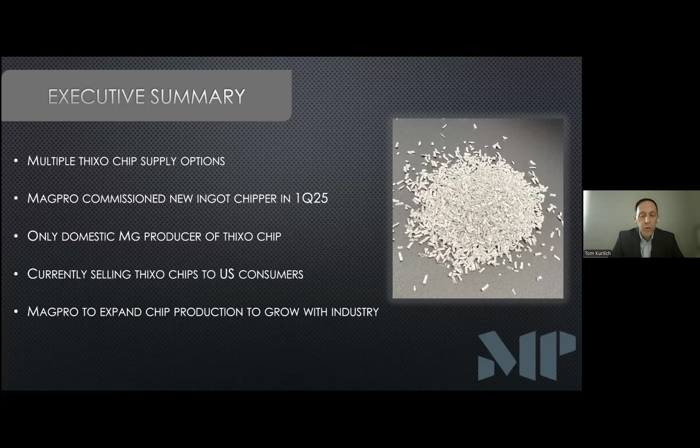In terms of an executive summary, consumers in the United States now have multiple Thixo chip supply options. Magpro commissioned a new ingot chipper in the first quarter of 2025. This decision was made to start producing chips based off of feedback from consumers and their request to purchase chips directly from a magnesium ingot producer. Today, Magpro is the only domestic magnesium producer of Thixo chips in the United States. We've been selling Thixomolding chips to our consumers in the US for the past 6 months, and based on the positive feedback from those customers, Magpro will be expanding our Thixomolding chip production in order to grow with the industry and ensure no risk of raw material supply interruptions.

A quick overview on Magpro. We were established in 2003 and have over 20 years of continual ingot production. Our facility is based in Camden, Tennessee. We are a full-service magnesium recycler specializing in type 1 and non-type 1 magnesium scrap. We are a producer of secondary magnesium alloys for a variety of industries, and we're the only pure magnesium producer in North America.

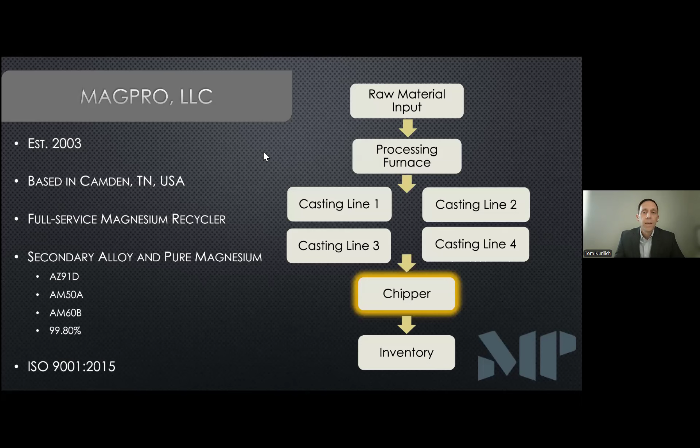Our production facility is ISO 9001-2015 certified. From a process flow, Magpro begins with the raw material input of type 1 and non-type 1 scrap. It's brought to our processing furnace and then taken to one of 4 casting lines that can produce a variety of ingots in different shapes and sizes. Those magnesium ingots can be directly sent to our inventory or to our new chipper to produce Thixomolding chips.

Looking at Thixo chip options, Thixomolders in the United States have the following 3 options when it comes to purchasing magnesium Thixomolding chips. The first option is to utilize a third-party chipper that's located in the United States. In this scenario, the consumer first purchases the magnesium ingot from a domestic or offshore producer. The magnesium ingot is transported to the third-party chipper. The ingot is then converted to a Thixomolding chip based on the availability of that third-party chipper.

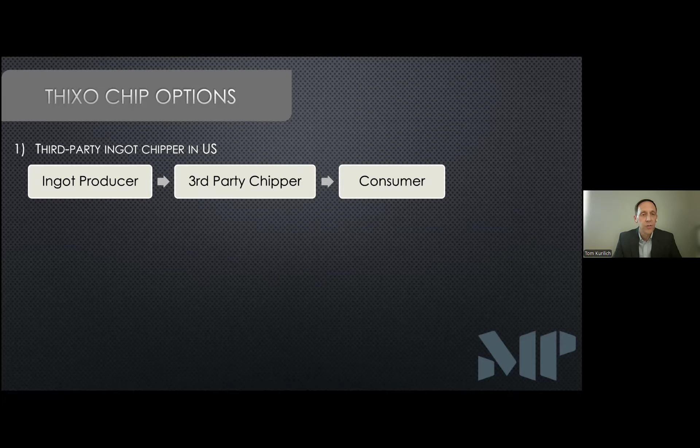Finally, the Thixomolding chip is then transported to the consumer. Under this scenario, the consumer must account for additional freight costs, lead time for delivery, the handling of any off-spec chips or ingot butt ends generated by the third party, and finally, the potential to carry additional on-site chip inventory to address any delays during production and transportation.

The second option is to purchase chips from an offshore magnesium producer. In this scenario, the magnesium ingot is produced and transported to a third-party chipper. The ingot is converted to a Thixomolding chip and then transported overseas to the consumer in the United States. Under this scenario, the consumer also has to account for additional freight costs, lead time for delivery, and the potential to carry additional on-site chip inventory to address any delays during production. Due to the excess time in transit, there is a risk of the Thixomolding chip being exposed to moisture, resulting in caking and oxidation within the packaging.

The third option is where Magpro comes in. This scenario allows for the consumer to purchase the chip directly from the magnesium ingot producer in the United States. This results in reduced lead time for delivery, reduced freight costs, reduced risk of moisture contamination and oxidation, and no off-spec or ingot butt ends for the consumer to deal with.

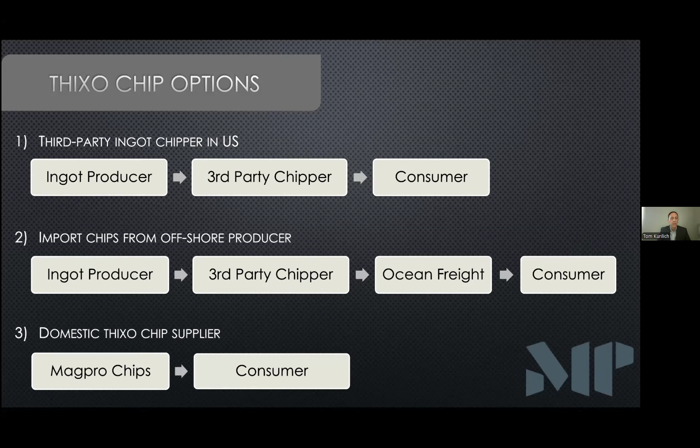Another advantage of this scenario allows for the consumer to form a closed-loop recycling agreement with Magpro, whereas 100% of the magnesium alloy scrap generated during the Thixomolding process can be recycled back to Magpro where we convert that back to Thixomolding chips. This results in cost savings for the consumer and them no longer having to deal with magnesium in ingot form.

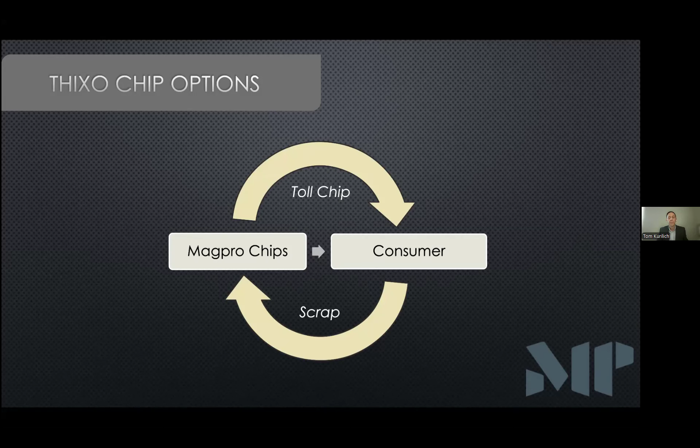Moving on to the commissioning of Magpro's chipper. The commissioning of our ingot chipper began back in the fourth quarter of 2024 with the construction of a new 3,000 square foot building located at our production facility in Tennessee.

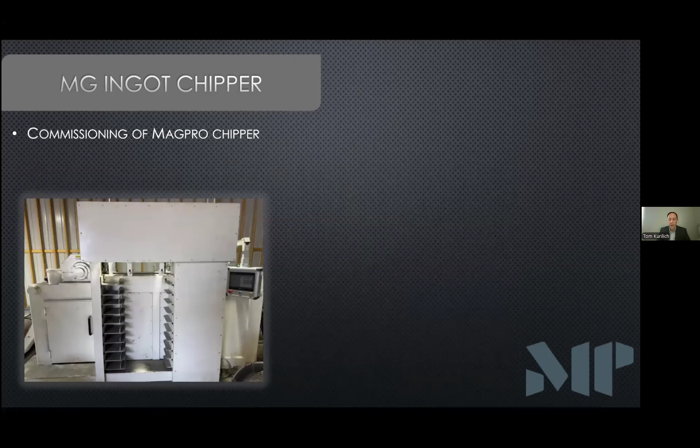Following the construction of the building, the ingot chipper was delivered and assembly began. Our chipper is equipped with an automated ingot feeder, as well as a high-powered magnet to capture any ferrous material, and any off-spec chip sizes or ingot butt ends that are generated during this process are simply recycled in-house by Magpro.

Here you can see the final product in chip form. These chips are consistent in size and shape, and they meet the requirements of the Thixomolding industry.

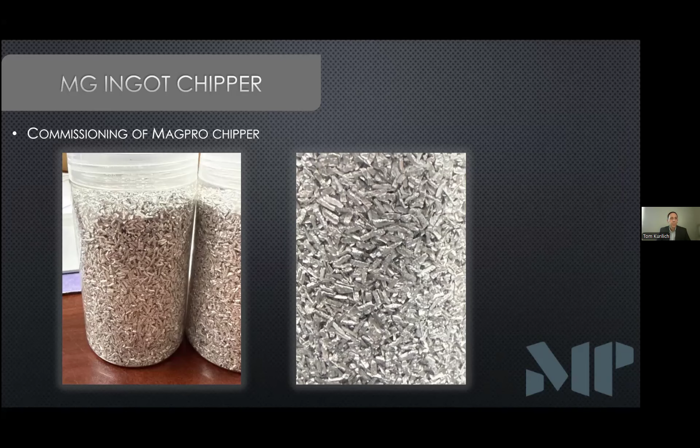Our Thixo chips are then loaded into super sacks, where we offer them in a variety of weights, up to 1,500 pounds, 2,000 pounds, and custom bag weights are available depending on the consumer's needs. These super sacks are placed on wooden pallets for easy transport to the end user.

In summary, Thixo chips are now available by a US magnesium producer, resulting in no off-spec or ingot butt end waste for the consumer. All scrap types can be tolled back into Thixomolding chips.

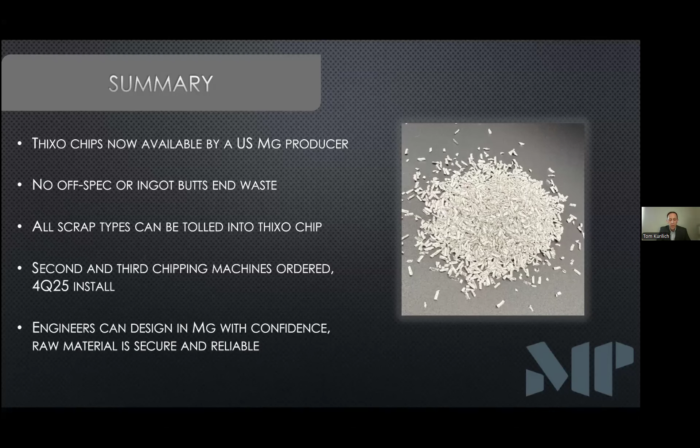In order to grow with the industry, Magpro has purchased a second and third chipping machine. Magpro will construct a new 7,500 square foot steel building to hold all three of these ingot chippers. The additional chippers will be installed during the fourth quarter of 2025, and production will be brought online as demand increases. Finally, engineers can now design in magnesium with confidence, knowing that magnesium chip raw material is available from a secure and reliable domestic producer.

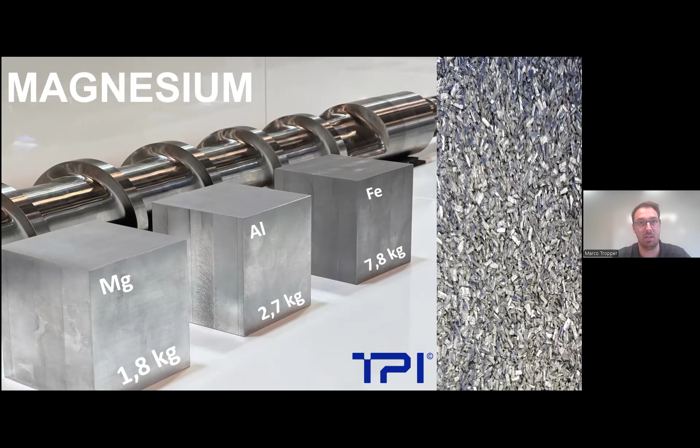As you know, magnesium is one of the lightest materials on Earth in the metal area. And we believe that in the future, magnesium has a very bright future, also regarding the fact that the EV and aviation businesses and so on are pushing more and more into lightweighting.

There were always questions why magnesium would never be a relevant material: magnesium is too expensive, too dangerous in production, and has too big a CO2 footprint. First of all, magnesium is already now in China lower in cost than aluminum per kilogram.

Second point, it's too dangerous in production. We solved this with our TPI technology, due to the fact that conventional Thixomolding is also a closed process with just-in-time melt preparation, and flame-retardant alloys are available. Last but not least, the CO2 footprint of magnesium can be lowered due to the fact that TPI only needs electricity to run, so it can be run CO2 neutral.

Magnesium can also be extracted from seawater, and with modern processes the CO2 emissions can be lowered even further compared to what was possible in the past.

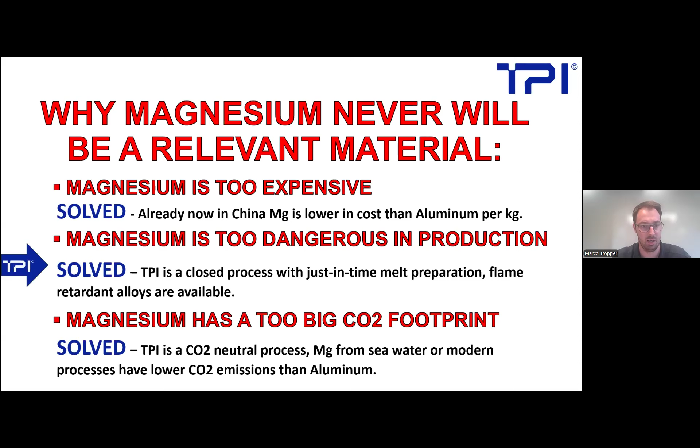So back a little bit to the history of Thixomolding. It was invented at the MIT Institute around the 1990s. They saw that when turning a ventilator inside a magnesium slurry, the viscosity was expected to stay the same. But due to the fact that the particles became globulitic, the viscosity went down, and from that the concept of Thixomolding was invented.

First of all, it was IP licensed by Thixomat. Out of the MIT Institute, Thixomat was founded and they held the patent on it, due to the fact that they observed the dendritic shape of the structure changing to rosettes, to mature rosettes, and then to the globulitic state where Thixomolding is used.

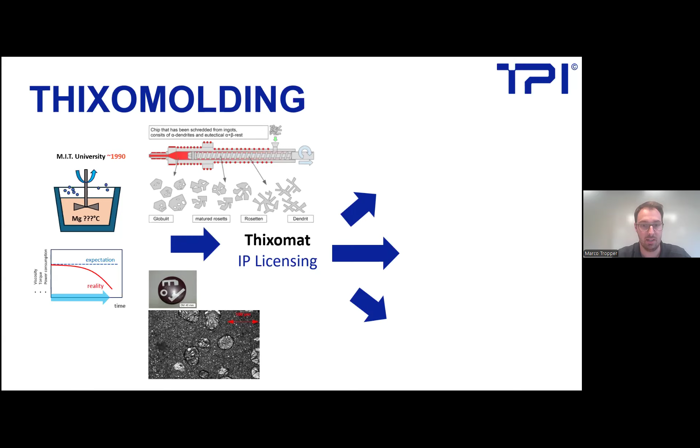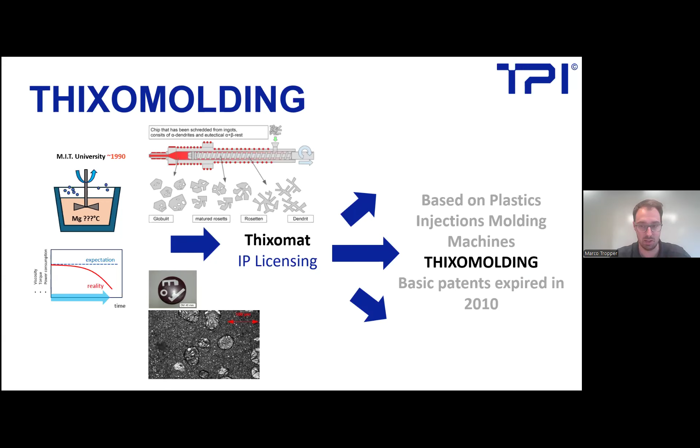After the licensing or patent expired, a lot of different suppliers entered this market and produced Thixomolding modules, or Thixomolding machines, which we call Thixomolding 1.0.

And why is still, let's say, nobody using it? This is because the technology is so new. And due to this fact, we have this webinar today, which is great to show what Thixomolding can do for you.

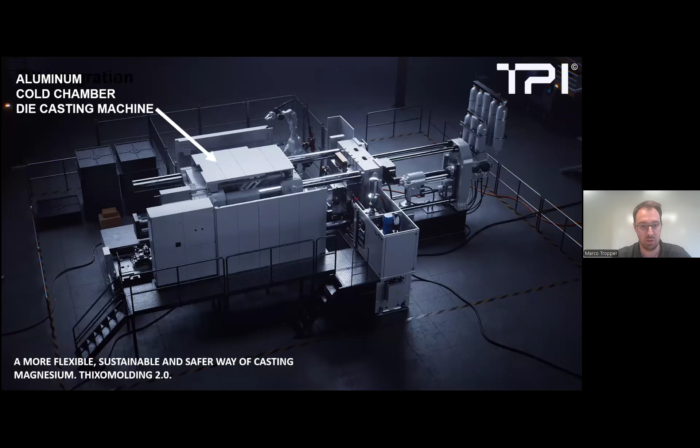So our module, which we call Thixomolding 2.0, as you can see on screen, puts a module that has a screw inside, bringing the material into the thixotropic state, onto an existing cold chamber die casting machine.

So we have a dosing unit, this is the TPI module. Additionally, the cold chamber die casting machine has the clamping unit and the shot unit. So you can do both processes with one machine, which can lower your capex.

Around 16,000 machines are operating in cold chamber die casting. We believe that with our technology and our module, we can bring a lot of these machines to Thixomolding, due to the fact that it's much easier, more sustainable, and more flexible for customers.

What we are combining is the plunger system of die casting with the screw system of Thixomolding, as you can see, along with the nozzle system with the plug. On the right side you can see the systems move together.

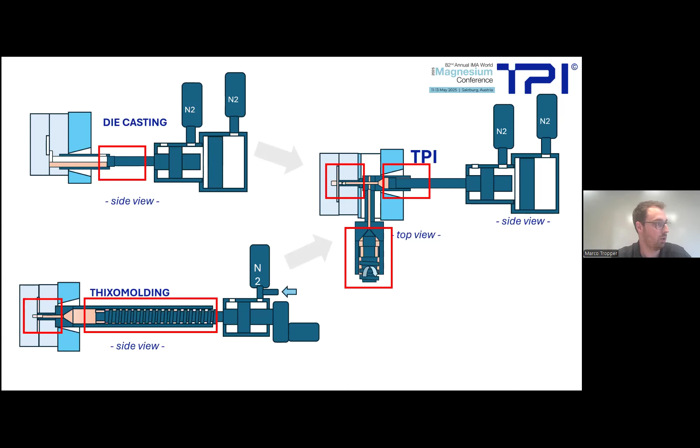We can shoot with the very strong injection unit of a cold chamber die casting machine up to 10 meters per second, while still using a screw on the side to dose the material and bring it into the thixotropic state inside the machine. The nozzle system also allows for a small gating system, and direct in-gating on the part is possible with our module.

Coming back to our name, it's Thixotropic Piston Injection. The T stands for the thixotropic state of the material, with low porosity, tight tolerances, and low energy consumption. The P stands for piston, with high pressure, no backflow like in a check valve system in conventional Thixomolding, and more cost efficiency since pistons are much less expensive than a screw to change during shots.

And the injection system with the nozzle system allows direct in-gating, resulting in less secondary material, and a closed process for safety.

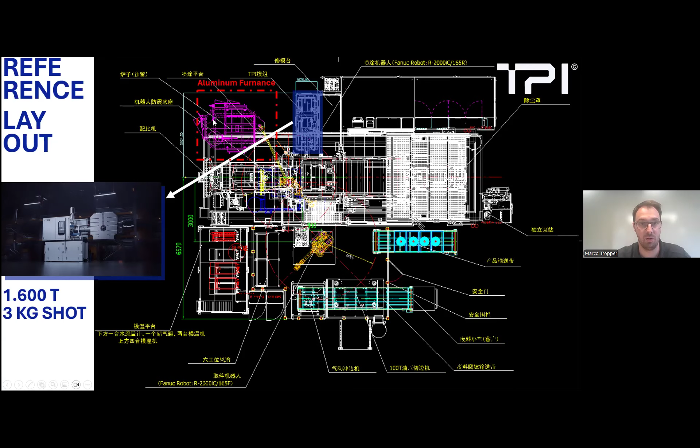Here it was a 1,600 ton machine with 3 kilogram shot weight. And still, you always have the possibility that the holding furnace of aluminum or magnesium can stand beside your cold chamber die casting machine all the time.

Here's a little bit of a sketch of our system, showing how you put the TPI module on your cold chamber die casting machine. You have your fixed machine platen, and you put the TPI system with the TPI plunger and shot sleeve on your machine. In the middle is the TPI platen, as we call it.

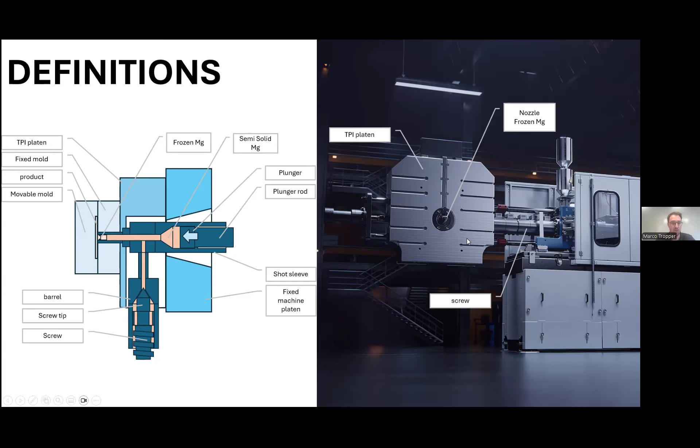It's an intermediate platen between your tool and the fixed machine platen. You need it because you have to mount our system, the screw and the shot sleeve together, and it has to be kept tight here in the front. On the lower side, you can see the screw tip closing here in the front. So you have to understand, against conventional Thixomolding, we never shoot with the screw. We always shoot with the plunger, and during the shot, we move forward with the screw, and with the screw tip we close the screw and barrel system.

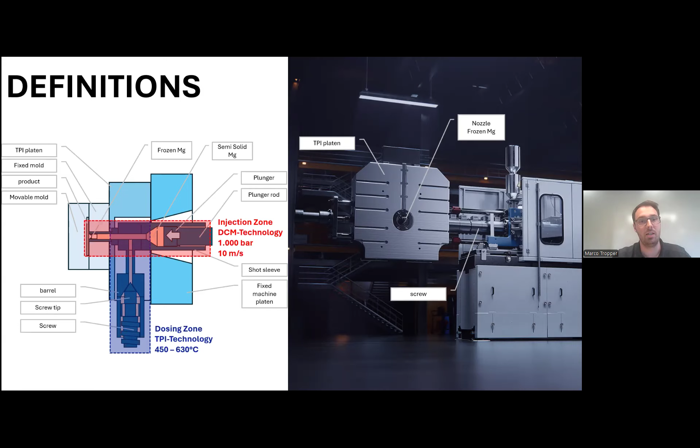We can go up to 1000 bars because the intensification pressure comes from the cold chamber die casting machine, and we have no backflow due to a check valve or something like that. To dose the material, in the end, the material is between 450 and 630 degrees hot.

These are the different steps. I will go a little bit faster, it's not so much time.

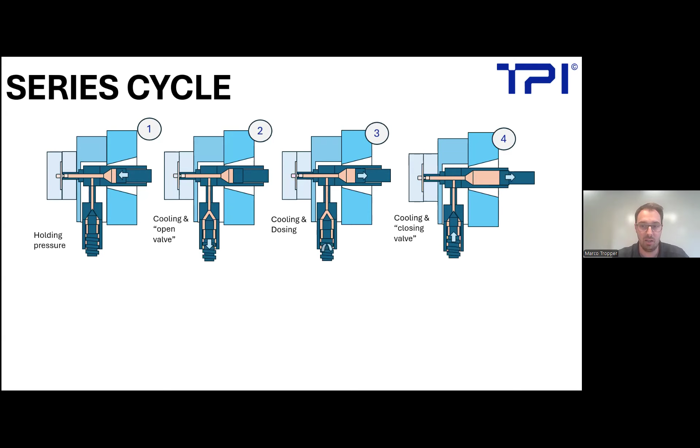First part, holding pressure is on it. The cooling starts, the screw moving backwards. We open the valve, the screw is turning, bringing the material into the shot sleeve. The shot sleeve is all of the time 100% filled up, so there's no air inside or oxidation. At the same time, the screw is turning and bringing the material into the shot sleeve. The plunger is moving backwards. Then the screw moves forward, we close the screw tip, and the plunger is in the back.

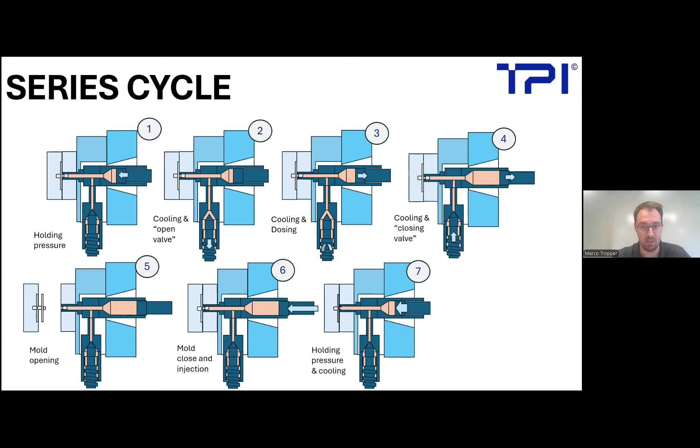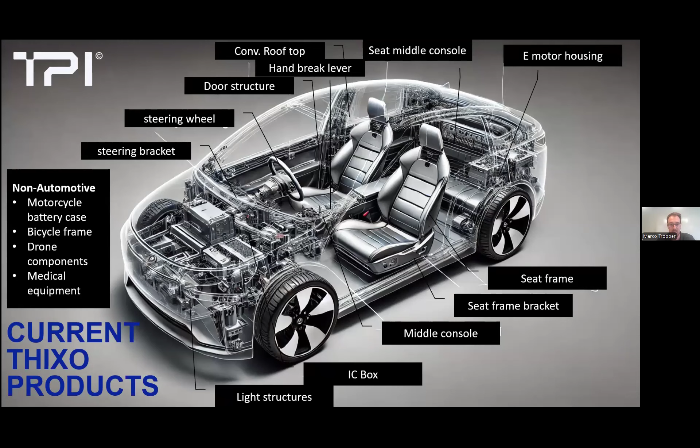A lot of Thixo products will come in the future. We have already cast steering wheels, brackets, IC boxes, light structures, and so on. Here you can see, in a very fast video, our TPI system.

And shot. So we have in Austria a 900-ton machine in the test center, and we really appreciate it if you have products and projects, you can come to us. We are casting parts for you free of charge, and you can see if you are happy with the system or not.

Also, beside TPI, there is DMS, the company above TPI. We are doing their filling simulation and gating design, so we can also help you there.

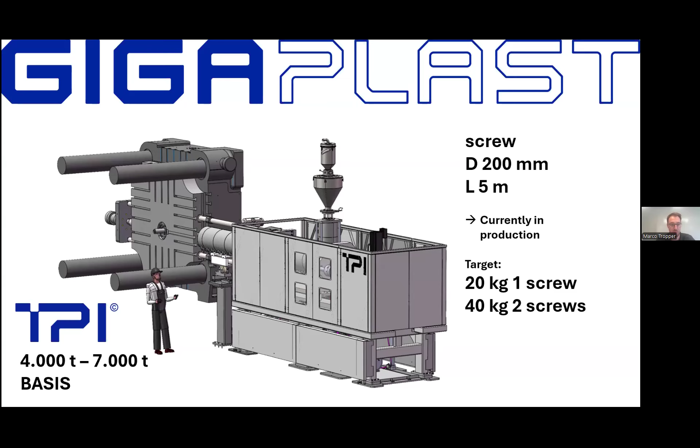And this is our biggest development, the Gigaplast. The target is, with one screw on one side, 20 kilograms, and both screws 40 kilograms, for machines from 4,000 to 7,000 tons. These are the different machines: Microplast, Superplast, Gigaplast, and Dreamplast.

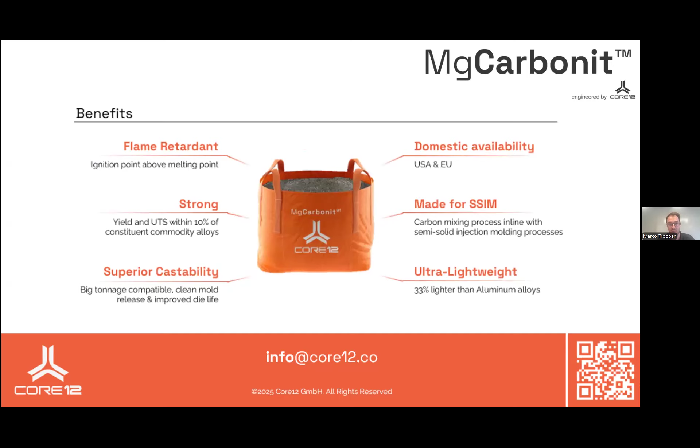Okay, Marco, it looks like we have a couple questions. Thank you very much for your presentation.

From the webinar chat, somebody asked, does it require any inert gas or cover gas?

This was one of the goals of the development. TPI was developed due to a subsidy project of the Austrian government, together with LKR. We only need the covering gas at the startup of production, when the shot sleeve is empty. But when the shot sleeve is filled up and the plunger, the piston, is sealed, then you can turn down the argon gas or the inert gas, so during serial production you do not need it.

Okay, then next question. Marco, can you share some experience of users of the module about switching between aluminum and magnesium chips?

Aluminium Thixomolding is on our agenda. Switching materials, for example from AZ91 to AM60, is quite easy. We have done analysis: with a D100 millimeter screw system, after 50 shots, the material is changed. If you mean to switch from aluminum cold chamber die casting to magnesium Thixomolding, it needs around 6 hours to put away the TPI module, and then you can do aluminum die casting again.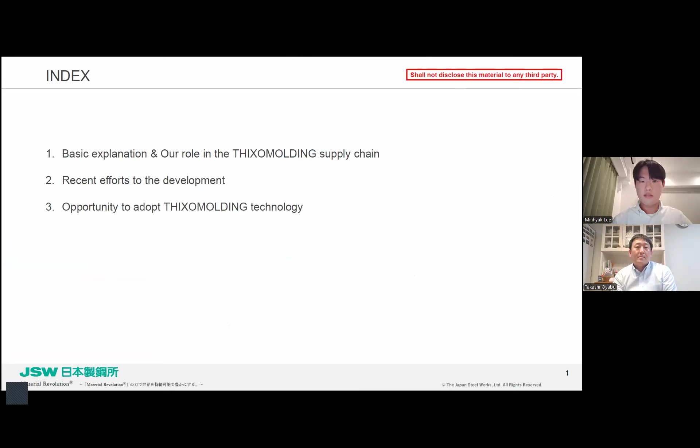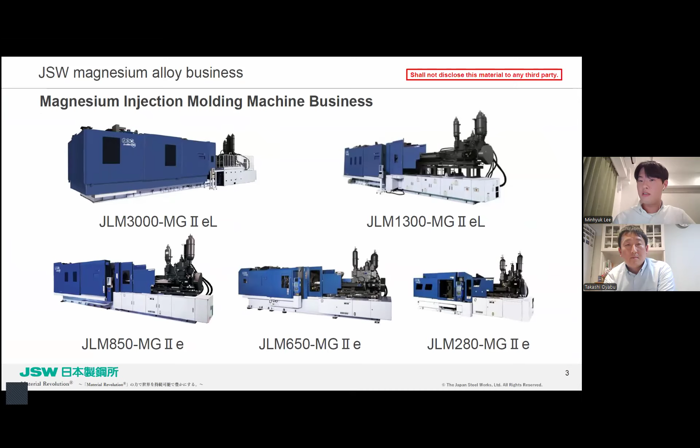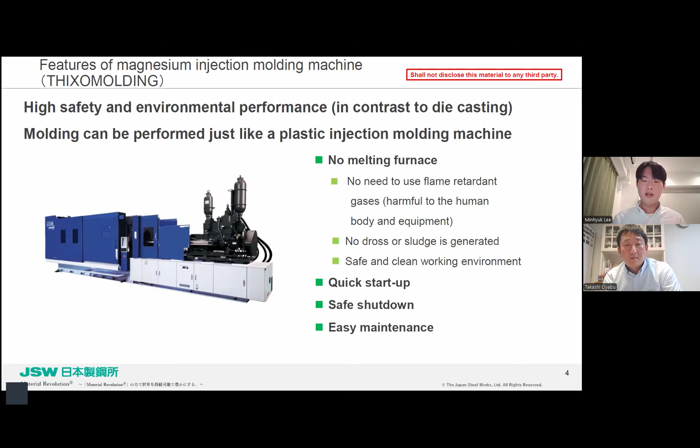Here is the index of today's presentation. The first part is a basic explanation about the Thixomolding machine and our role in this supply chain. As you guys already know, JSW develops, produces, and supplies the magnesium Thixomolding machine. We have 5 models, distinguished by their clamping force, and you can check the features of the Thixomolding machine in the next slide. In contrast to die casting, it has high safety and environmental performance. The molding by this machine can be performed just like a plastic injection molding machine, so it doesn't have a melting furnace, and doesn't need to use cover gases, flame retardant gases which are harmful to the human body and equipment both. It doesn't produce any dross or sludge, so we can have a safe and clean working environment. On top of that, we can start it up quickly, shut it down safely, and maintenance is easy too.

Next, let's see a table that shows the specification of each model and examples of molded products. As you have a bigger model, you can produce bigger products. Please refer to the slide.

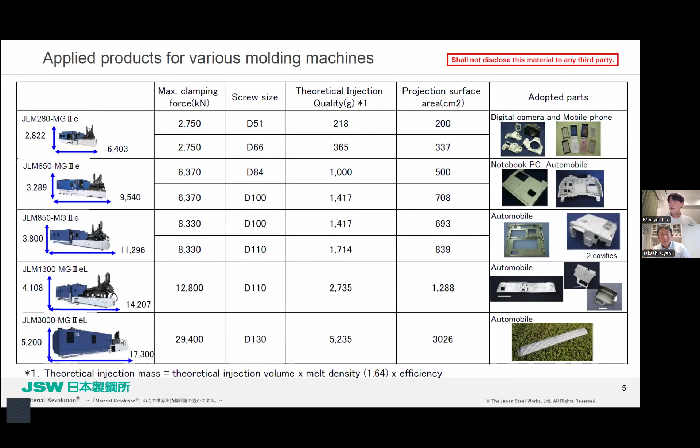Next, let me introduce our support system. We provide production of prototypes and mass-produced products too, and we also provide evaluation support like physical properties evaluation and prototyping. We also support model selection, flow analysis, and molding machine troubleshooting. Please refer to these slides.

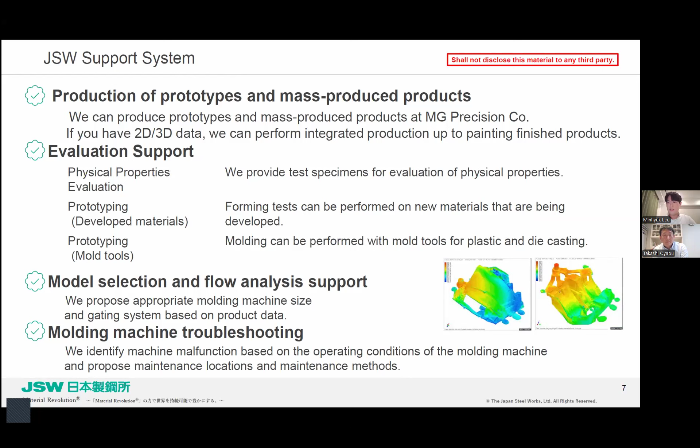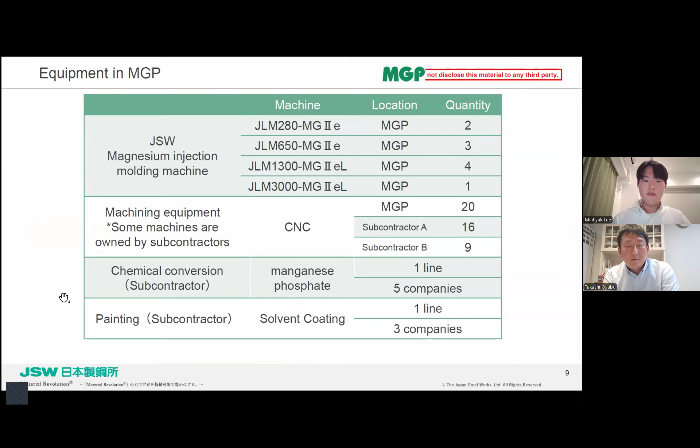Let's move on to our recent efforts in development. The development of a high temperature screw cylinder for AM50 materials is a good example of our recent effort. Our purpose for this development is for steering wheels and cross car beams. Not only about the machinery, but we also conduct research about new applications of alloys.

Recently, we are conducting research about the application of magnesium lithium alloys to Thixomolding machines. In this case, we also make connections between our users and the alloy supplier through our existing business partners.

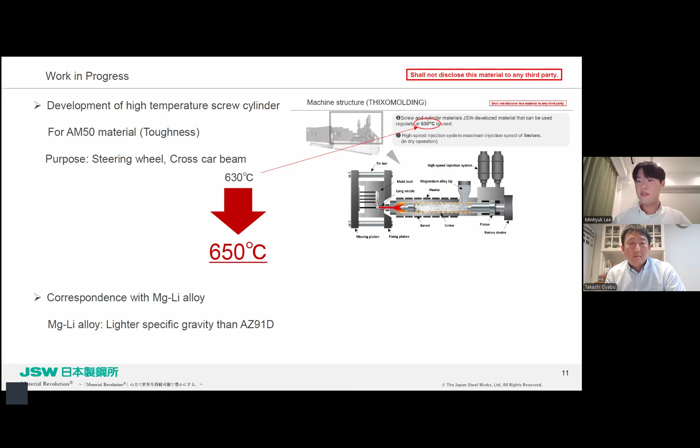Let's go back to our machine models. We have developed 1300-ton and 3000-ton machines recently, and now we are heading to our next model, the 1800-ton machine. We have begun development of this 1800-ton model and hope to introduce it to our customers in the near future.

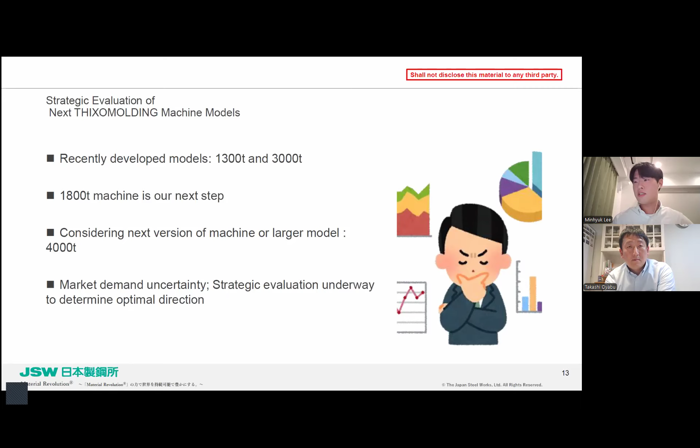We are also considering developing a next, bigger model like a 4,000-ton machine. However, it's also true that we can't be assured whether the market wants a bigger Thixomolding machine, or instead a next machine with more developed technology. So now we are in strategic evaluation to determine the optimal direction.

Next, let's move on to the opportunities in adopting our Thixomolding machine. We are now monitoring the possibility of application to the aerospace industry too. We already found that some of our customers are supplying their products to one of the biggest global companies in the aerospace industry. The automotive industry has been going through a tough time lately, but this new industry we've discovered is pretty exciting for us.

However, we recognize that this is still an early stage. It is crucial that we approach this opportunity with careful consideration and thorough research. We are currently evaluating the potential of this industry, and we aim to develop a strategic approach that aligns with both our capabilities and long-term goals.

So today, I'll be truly happy if I can get any new insight about the application of Thixomolding technology to aerospace from you guys. This is the end of my presentation. Thank you very much for listening.

Thank you very much. Thank you.

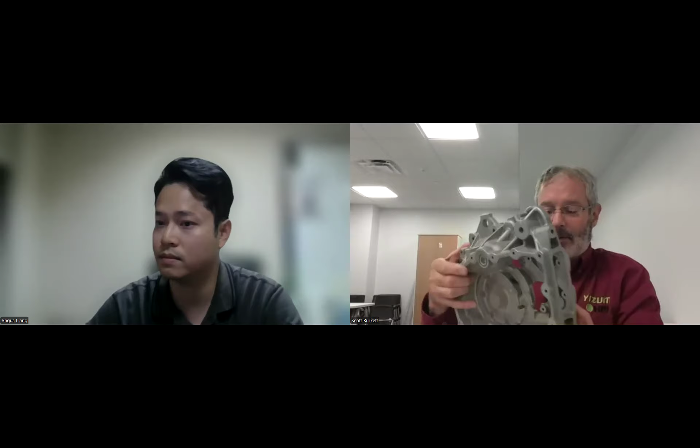Talk to most Americans, the big problem with electric is how far I can go, and that needs to change. Here's another part, actually there's a steel insert race in here for this electric vehicle housing. You can see your scrap or your runners is only going to be a little bit on these converted parts.

Could these be made with thinner walls? Yes, but these were just trials to change the part from aluminum to magnesium. So everybody, I think this is here to stay this time. This isn't going to be like the 80s or the 90s and the 2000s.

Yeah, I guess keep your eye on Thixomolding. It's everywhere—military, space, auto, medical, gas and oil, computers, it's everywhere. It's going to be a new process in this world, one that worked well before, and I think will work better today.

That's about all I got. Angus is going to show all the big parts that we're making.

Angus, you're on mute. Can you unmute your audio? Can you hear me? Yes, we can hear you now. Hello? Can you hear me? Hi, yep. You can. Okay.

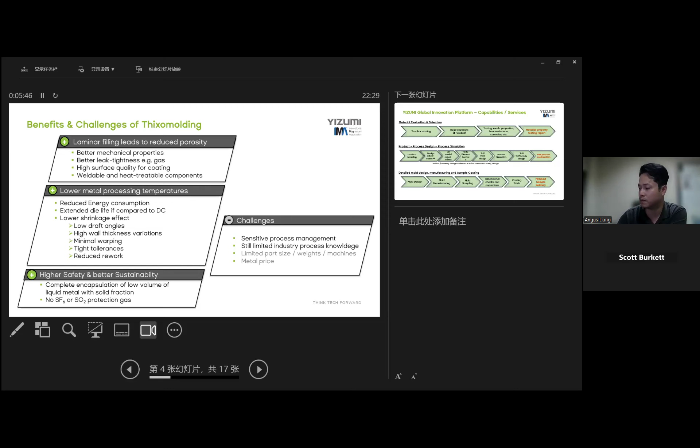This would be one of the most important parts, I would say, for Yizumi - what we can do for our customers. We're not just a machine builder. We can actually support the customer from scratch and try to minimize risk. We start with material evaluation for the customer, doing test bar casting, treatment, and all kinds of mechanical property testing, and after that we generate a test report for our customer.

After that, we're able to look into the product design and adjustment. If the customer previously used plastic or aluminum for this part, we're able to help convert it to magnesium. After that, we do part simulation to confirm to the customer that yes, this part is able to be Thixomolded. Later, we're able to do detailed mold design and manufacturing, and do sample casting for our customer to send over to the end user, to see if it's able to meet the final customer's requirements. This is very important for us in helping our customers.

These are recently some projects, trial castings happening in China, which the OEM or some potential customers came over to do the testing. As you can see, most of them are 2,000 ton and 3,200 ton, and they mainly do motor housing, thick wall casting in China, not thin wall. We are able to help them do X-ray scanning to see whether there are any defects, porosity, etc.

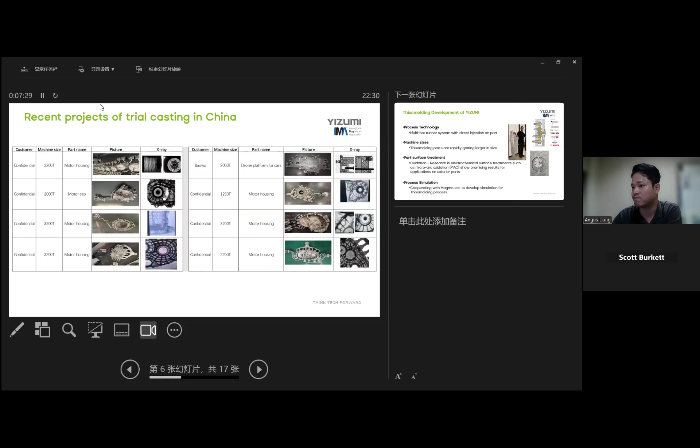And part surface treatment. So as we're also aware, magnesium exposure to the air, this would cause corrosion, etc. So we're actually cooperating with an institution in China to test such things like oxidization, and research in electrochemical surface treatments. That resulted in a good result in regards to this application on exterior parts. If you want to know more about it, send me emails, I will be able to get a specialist to answer your questions.

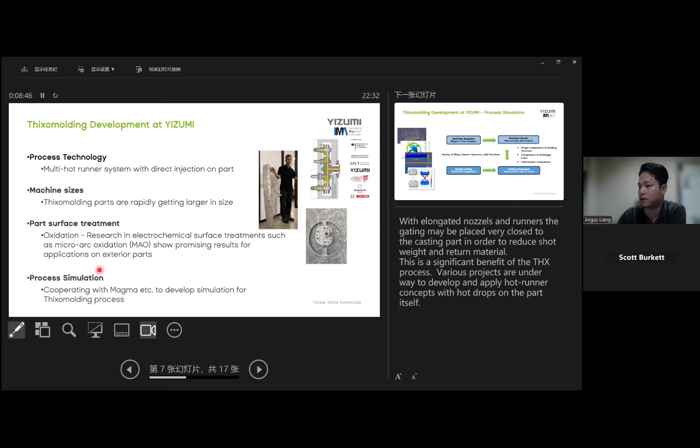And the last one is the process simulation. So we actually cooperate with software partners like Magma in order to develop simulation, which I will show you in the later pages in detail. Basically we do simulation and then we do actual casting and then we do comparison with the simulation and the actual casting to find out whether the simulation we have done is proper.

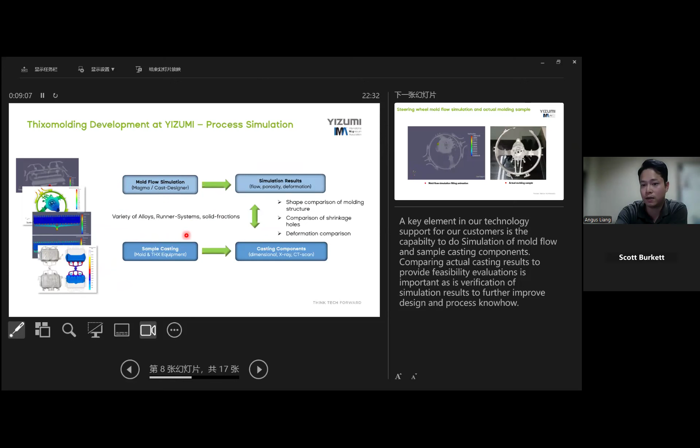One example, just quickly to show you the simulation results. Let me just stop at some point for the simulation. Basically this is the parameter setting we have input into the machine, and compared to the actual casting, this is quite identical, I would say. This is just one of the examples.

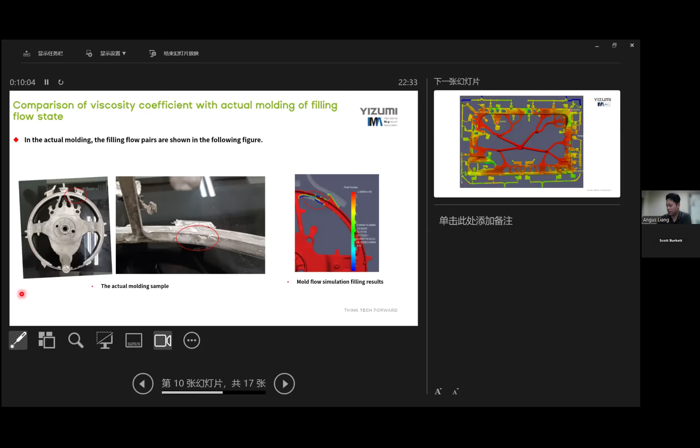Again, if you want to know more about it, send me emails. This is the cold flow we found from the actual part and the simulation. And this is another simulation we have done, for this kind of big part, car door frame, with multiple hot runners.

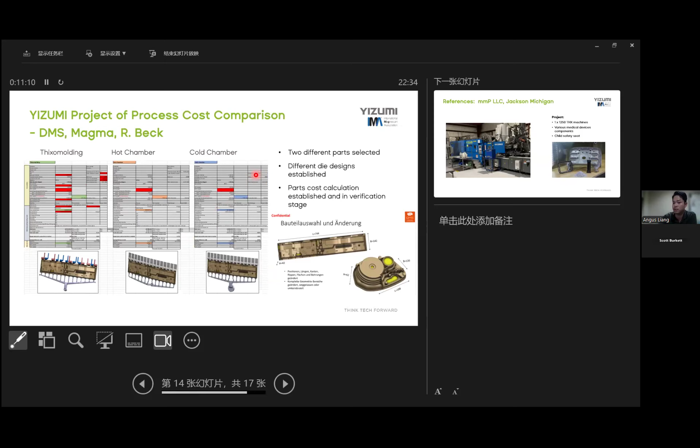Cost simulation we also did, since we have so many different processes involved—we also do hot chamber, cold chamber, and Thixomolding. We generated formulas, or a concept, of how to help the customer do calculations. But of course, this needs a lot of real-life examples to support this. This is a reference from our US customer MMP, they have our 1250-ton machine and do child safety seats and other different parts.

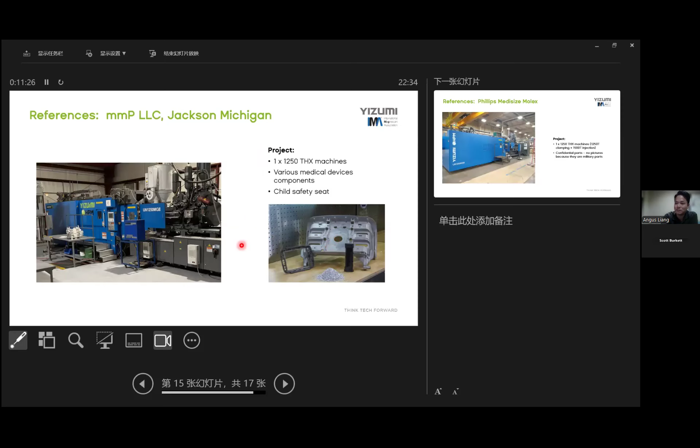And another customer in the US, Molex, also our customer, does military parts. I don't have the picture because it's confidential. So I think that's all, thanks for listening.

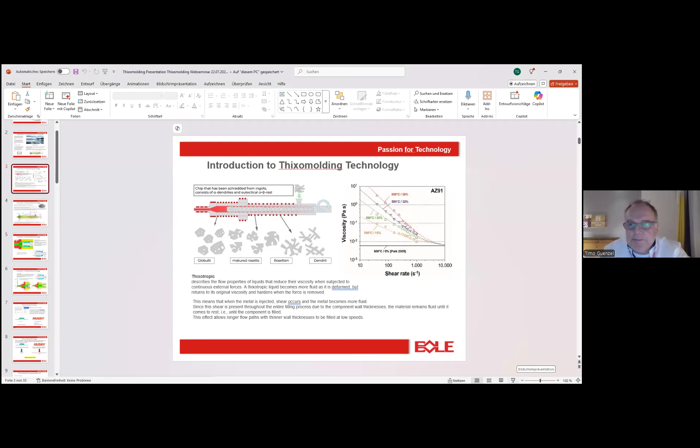We believe Thixomolding will make a revolution, especially in the lightweight structure components industry. I want to present what we think and what we do at the moment, and go through the process that we've discussed many things about already.

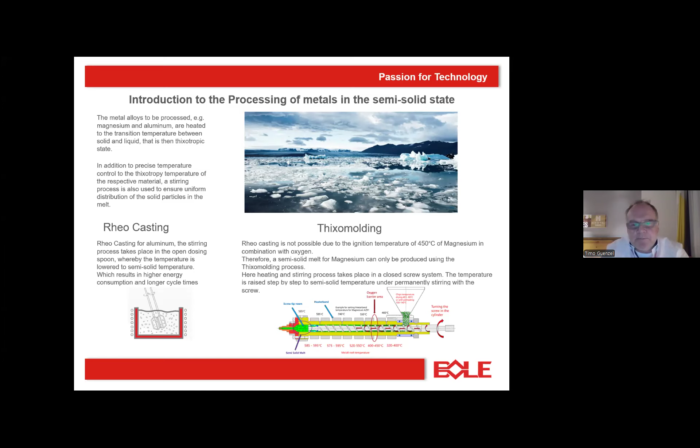This is the thixotropic process. We bring the material to a transition temperature, then we stir or slurry the material, which you can do with aluminum and rheo casting. This is simple to do in a ladle, but when you do magnesium in a ladle and want to make a slurry, that is very dangerous based on the temperature. Here we use the screw to make the slurry.

What Marco explained about the transport of the chips from the feeding zone along the screw to the front area, we change from the dendrite status to the globular status. Here you see on the right side the chart. There was a question in the meeting about temperature and solid fraction.

With AZ91, if you run at a temperature of 595 degrees, you have around 50% solid fraction. When you run the same material AZ91 at 580, you have around 38% solid fraction. That means with AM60, the temperature range shifts plus 20 degrees, and with AM50, plus 30 degrees, and then you have nearly the same results.

Normally you run the Thixomolding process between 15 and 20% solid fraction. But when you run the machine at 600 degrees, the solid fraction with AZ91 is nearly zero. So we have to take care that we run really below 600 degrees for AZ91.

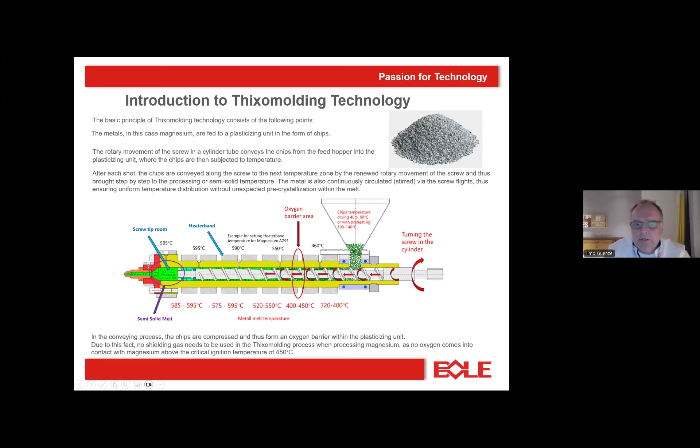So what we've discussed: we have chips, we bring them into the feeder, the screw turns, and we bring the chips along the screw to the front area. Based on that, we build an oxygen barrier in the middle. This means we don't need the safety gas we discussed earlier in the group.

When we have enough material in front of the check valve, we press the screw back to the position we want for the shot. The accuracy is plus minus 0.1 millimeter, meaning our dosing or shot accuracy is plus minus 0.05%. Compare that to die casting, where we talk about plus minus 1% or 2%. That means the Thixomolding process is very precise.

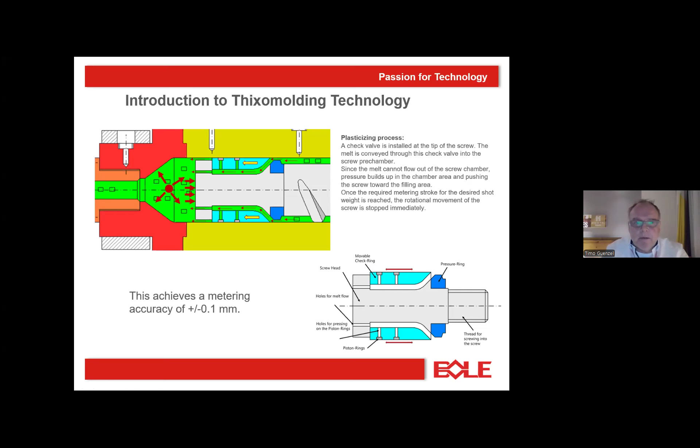Also, the speed in Thixomolding technology when moving the screw forward is much less than in die casting. In die casting, they run between 5,000 and sometimes 8,000 millimeters per second. We normally run between 2,200 and 3,300 millimeters per second, depending on the semi-solid fraction.

Thixotropy means when you have a semi-solid material and apply friction to it, you can reach a longer flow way. That's the principle of thixotropy. This means on a Thixomolding machine, you can have longer flow ways with lower wall thickness, and you need less speed. Our experience shows a ratio of flow way to wall thickness around 400 to 1.

That means when you have a wall thickness of 2 millimeters, you can have a flow way from the injection point to the end of the part of 800 millimeters.

So what's the history in short? Why is Thixomolding coming to a revolution now? Thixomolding is an old technology. The problem was a patent situation in the past, and we ended up with only two suppliers in the world: Japan Steel Works and Husky.

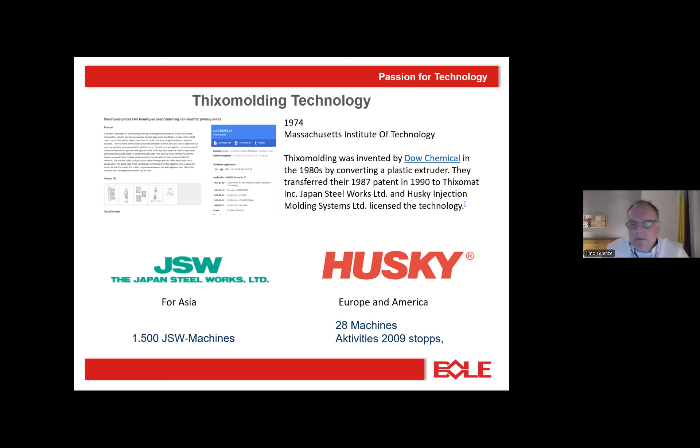Husky stopped all activities in 2009. JSW concentrated fully on electronic parts, and they were very successful with that. But the problem in the past was that machines were only available with a clamping force of 1,000 tons and a shot weight of 1 kilogram, meaning you could only run 650 gram parts. That was not a solution for the technical parts industry and automotive.

That was the reason Thixomolding never really came into the automotive or other industries. It was only in the electronic industry. So what was the dynamic then?

Yizumi started in 2019 with a 1,200 ton machine with a 100 millimeter screw. Then JSW increased the screw diameter. Then Bole came on the table. We built a 1,650 ton machine with a 135 millimeter screw. And at the moment, the status from Bole is we have a 5,000 ton machine with 22 kilogram shot weight with a 190 millimeter screw.

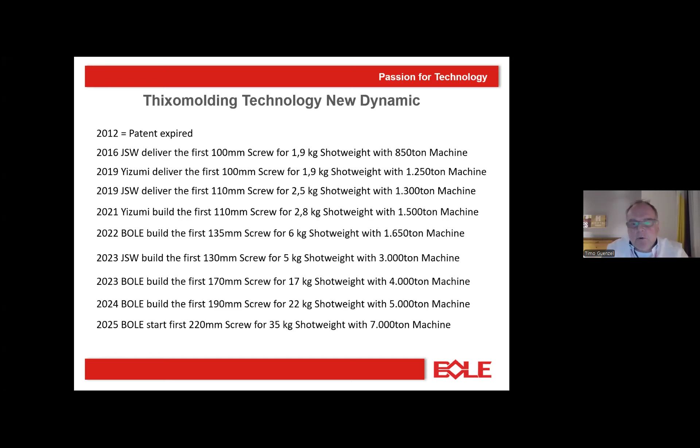That brings huge dynamic to the market, that you can now realize huge shot weights with the Thixomolding process. So that is our line. We have a small one, a 1,300 ton, and the biggest one is a 7,000 ton.

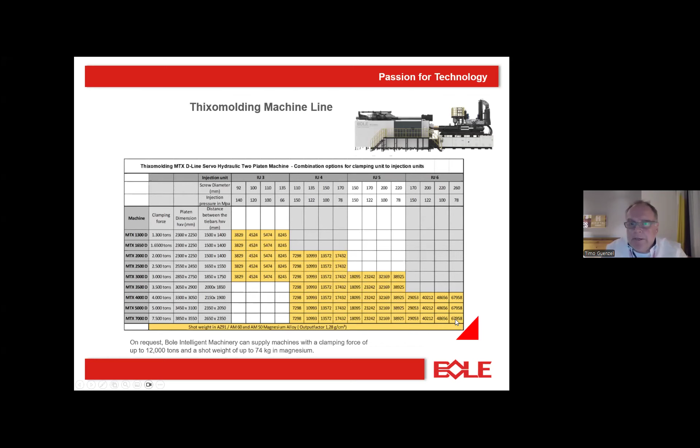And you see here also what our view is. We see that by 2026, we will have a 70 kilogram shot weight. At the moment we work on a screw with 48 kilogram shot weight. That comes at the latest starting next year, together with the 7,000 ton machines.

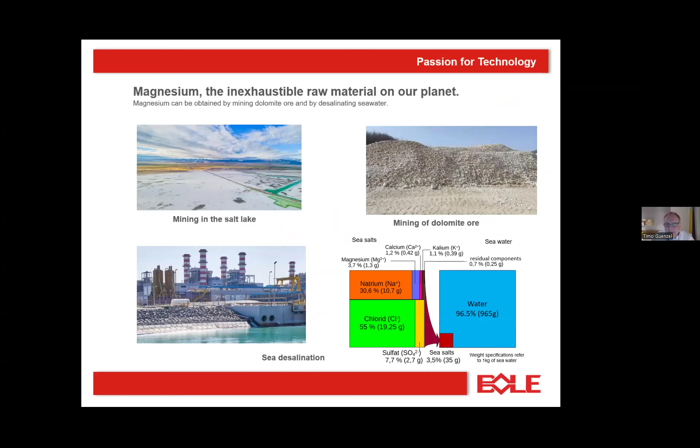So we've discussed why we do magnesium. Magnesium is a lightweight material and its CO2 footprint is better than aluminum. What's clear for us is magnesium is a never-ending material in the world. When you see how we can produce magnesium in the world, this is a never-ending material. That is one of the biggest points for us to invest in this technology.

Then, of course, China has a strategy to reduce the weight of cars. More and more magnesium is coming inside the cars. We expect that by 2030 we will have 45 kilograms of magnesium in cars. That means we need a lot of machines in the market.

We've also discussed the price situation between aluminum and magnesium. Magnesium is lower priced than aluminum, and for the same parts, magnesium is 33% lighter. That means the cost reduction is currently 40%, and the Chinese car makers see that, and these guys invest a lot in this technology.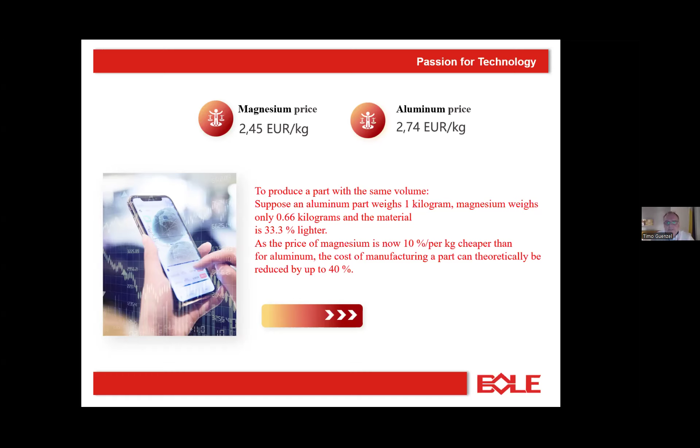On energy consumption, as discussed, we have measurements showing the energy consumption of our 4,000 ton machine is 0.46 kWh per kilogram. When you look at a 4,000 ton die casting machine, it's 1.18 kWh per kilogram. That means it's more than half the difference, which has a huge impact.

Also, with a Thixomolding machine, on the weekend when you have no production, you can shut off the machine completely and start again on Monday. Nobody can do that with a die casting machine.

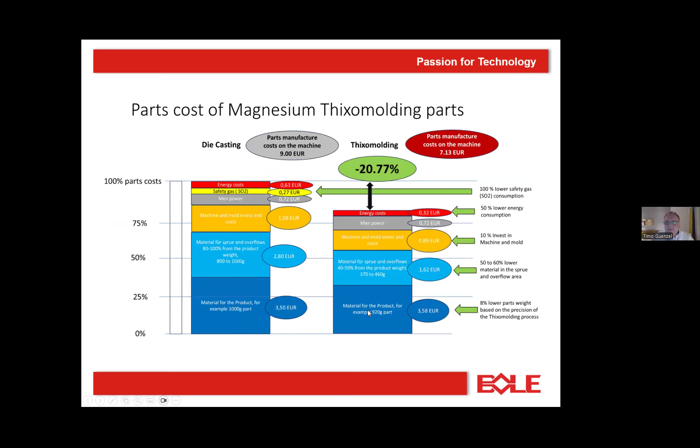On cost reduction, when we calculate magnesium die casting against Thixomolding, you can calculate it up and down, and you find every time a difference of 20% cost reduction with a Thixomolding machine.

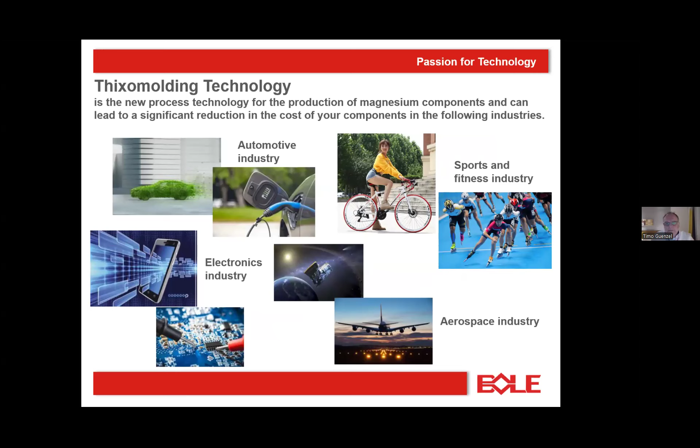So what are the industries for us? Of course automotive, sports industry, electronics, aerospace. Those are the typical parts we discuss and produce at the moment in automotive and electronics. Of course also fitness industry, sports, aerospace - as explained, there are a lot of projects in this area.

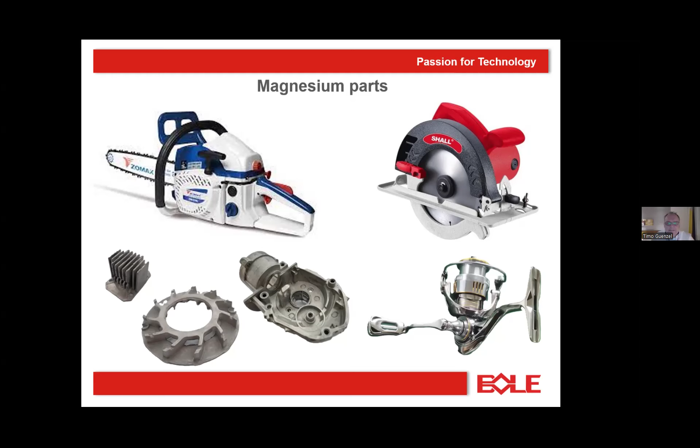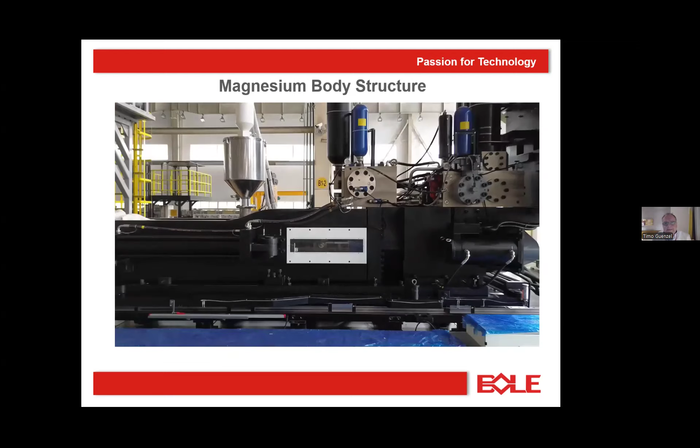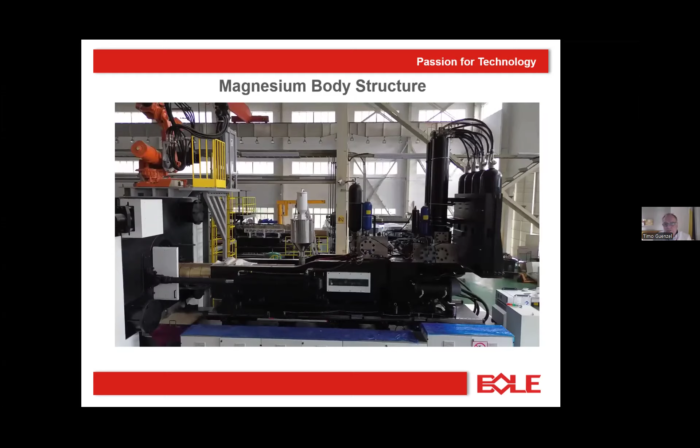You see we are the company that built Thixomolding based on a two-platen machine. This is a big advantage in the future when you want to replace a die casting machine. The shot end of a die casting machine is very short, and the clamping unit is normally a toggle. In Thixomolding, the injection unit is very long, and we need a very short clamping unit. That was the reason we went to two-platen technology - to reduce the length of the machine so the customer can really replace the die casting machine on the same spot where it was before.

So then we produce magnesium housings - that's also on our 3,000 ton machine, a magnesium housing production that works on our machine. You see here, fully automatic, it's an engine housing.

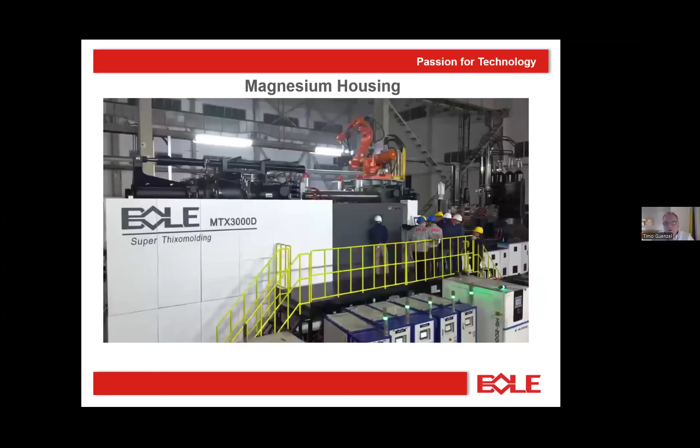That is one of the mega trends in the industry in China at the moment - many companies want to reduce the weight of components. You see here the engine housing in the air, produced on a 3,000 ton machine with a 170 millimeter screw.

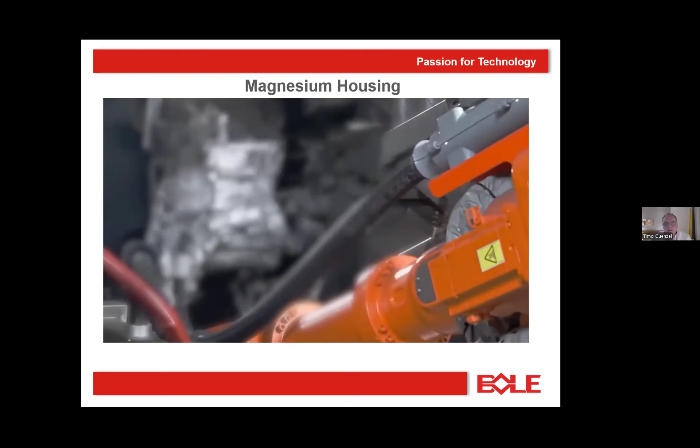So we are the one which produce wheels, 20-inch wheels, on the 3,000-ton machine with a 190 millimeter screw. That is at the moment a huge project in the industry, wheels. We also have a video here. If you want to see that, I can send it to you. Based on the time, I'll speed up a little bit.

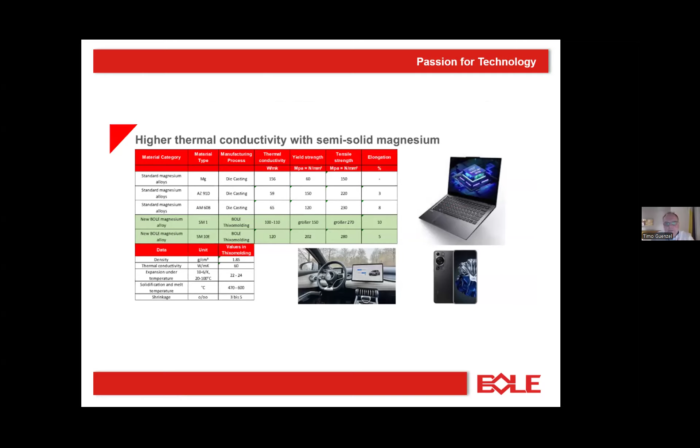One of the mega points is we invest also in material development. We make a lot of material developments for better thermal conductivity, better strength, better corrosion resistance. That is one of the biggest points, especially for outside car parts.

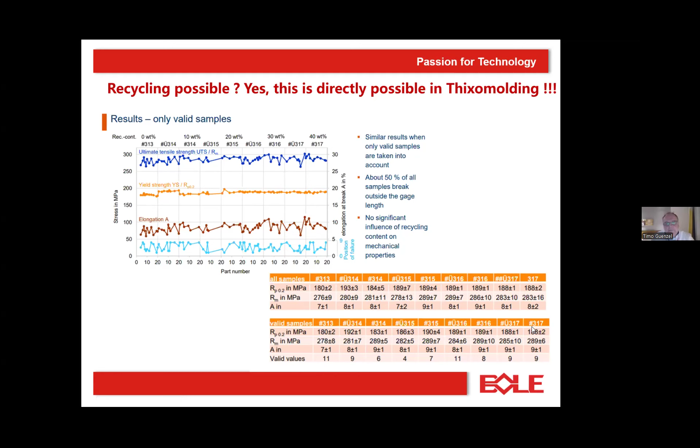Recycling is our point. We have found out that you can make a direct recycling for the sprues and overflows. You cut it, bring it back to the Thixomolding screw, and have the same result. When you see the number 313 is without recycling material, the 317 is with recycling material. That means the property is the same, and the customer has a closed loop material recycling process.

We have a hot runner running right now. That is one of the mega trends. We want to reduce in the end the shot weights. That means in the future, we won't have any more sprues and overflows. That is the strategy, and we want to run without flash. That is the strategy from us, that in the future we run without flash. That is our opportunity, what we have.

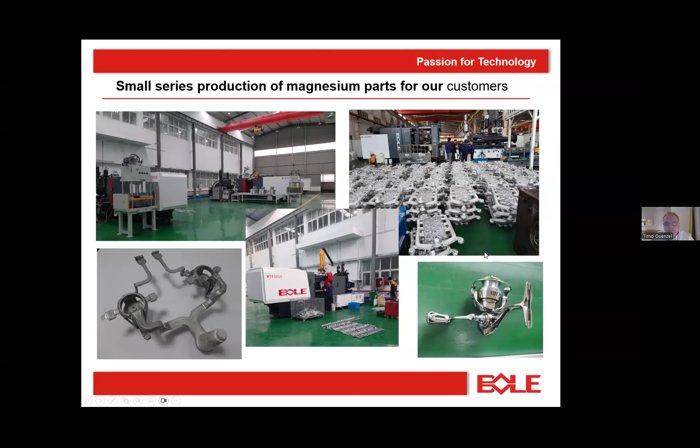We have 300 tons in the lab, 700 tons in the lab, 1,650 tons in the lab, 2,000 ton and the 3,000 ton. End of the year, we have a 5,000 ton in the lab for test parts for the customer. And we make some test trials, a lot of test trials.

So I hope I am in time, Rose. Yes, you're perfect, good on time. I speeded up a little bit, but good, many guys have presented right now many things about Thixomolding, yes, it was very nice. And we do have time just for a couple questions, if you'd like.

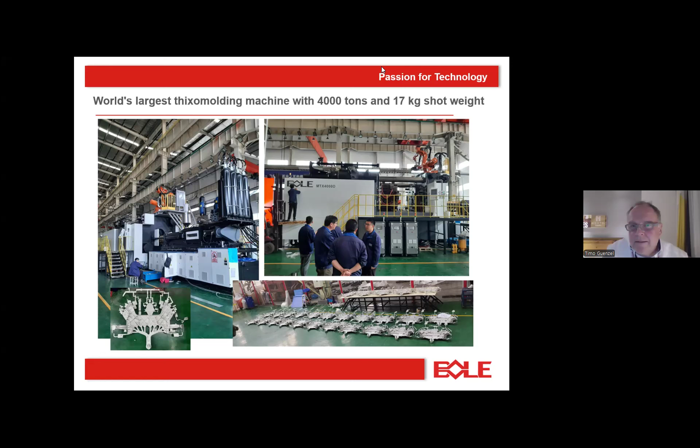The first question is, what cycle time is possible with the 5,000 ton machine at 22 kilogram shot weight? This depends on the wall thickness of the parts, but we expect that we can run between 90 seconds and 2 minutes, depending on the wall thickness. When you have a structural form part with a wall thickness of 2.5 millimeters, you can also run in 60 seconds, but you will never have 22 kilograms then — maybe 15 kilograms.

Another question: for Bole, how many 3,000 ton machines are currently in production worldwide? Do you see a recent uptick in interest? We have running at the moment 3 machines. I have seen that JSW have also 4. I don't know what Yizumi have, but we have an order right now for additional 3 machines, 3,000 tons. I expect that next year we'll have maybe a minimum of 20 machines in the market, what we see from the project view at the moment.

Who produces the shown subframe in Thixo casting in series production? That is a prototype, not in series at the moment. Most of the parts that at the moment come in Thixomolding are test and try parts. We have around 25 machines running in series production currently, but that is mostly parts we delivered last year. The parts we're delivering now, maybe the wheels or the engine housing and so on, I expect will come into series production next year. The automotive industry needs time — China speed is faster than European speed, but these guys still need about 24 months at the moment.